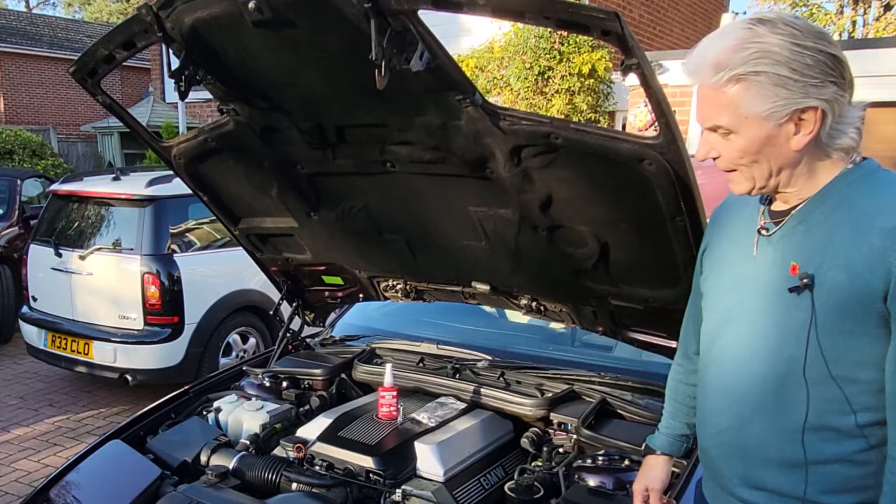I've had a valve cover oil leak. Yeah, it makes a bit of a mess. The oil drips out here, gets on the timing cover, and then gets all dirty and ends up looking black.

I noticed this when I was doing the last video about the camshaft sensor, so I thought I'd do something about it straight away. That was about 3 weeks ago, and the fix has worked really successfully, so I'm quite happy to show you it now.

Now, the problem with the valve covers is they have rubber buffers and a big gasket, and the usual fix is to pull the cover off, replace the gasket, replace the rubber buffers. Oh, and don't forget the RTV at the back on the half moon shape.

Did that on my M60. Yeah, it was all right, not too bad of a job, bit fiddly, but I thought I'd come up with a completely different plan that's going to take just a few minutes to fix rather than spending a few hours doing it.

Now, it's exactly the same fix as I did on the inlet manifold, which I did about 10 years ago, and that's proved 100% reliable, and it's helped a lot of people out as well. Very glad with that fix.

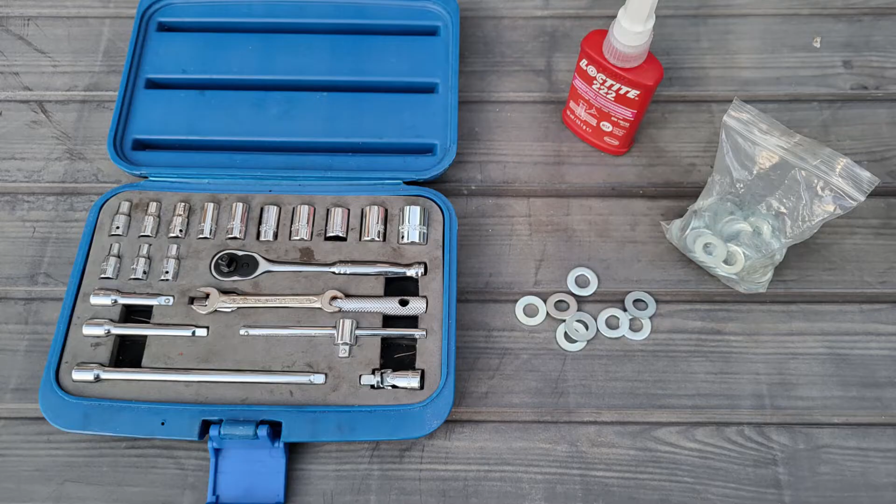So we're going to use a very similar routine, and all you need is a bag of washers, and I'll put up where you get them. Small socket set, and it's very important to use a small socket set. These fixings can be brittle, and you don't want to put too much pressure on them. Loctite 222, and that's all you need. Right, I'm going to bring you in, let's get on with it.

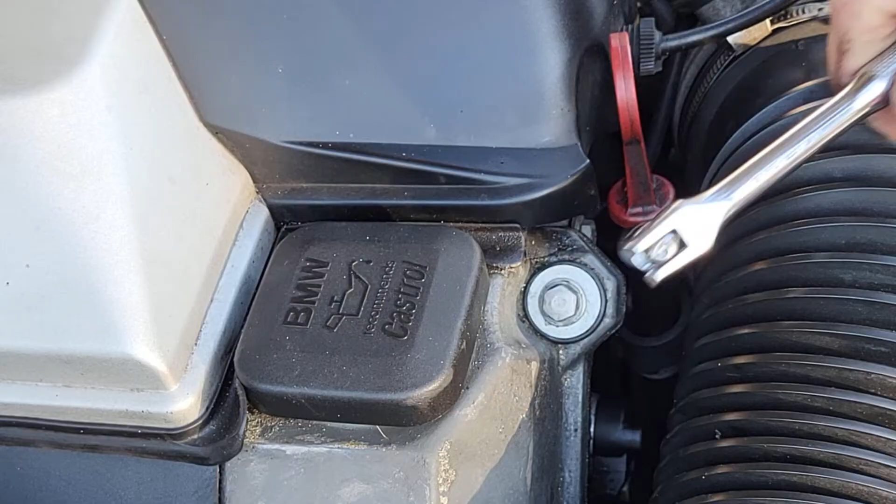Right, let's have a look where the problem is. Here's one of the fixings. That is a blind nut, not a bolt, and that confuses quite a few people. They're generally not tight, they come off with a bit of a ting. Right, let's get the blind nut out. There we go.

There you go, it's a blind nut. The thread doesn't go all the way through, it's got a hex top. Underneath that is a compression piece, which is a little rubbery gaskety thing. That's what one looks like. And there's the stud there. Now, the thing with these blind fixings is that they'll only tighten up a certain amount.

So if I plop that on there and tighten it up, there you go. So that is as far as it's going to go. Try and tighten that and you're just going to snap the stud off. That's how it works. The thread goes into the blind nut and arrests its movement.

Now, that was great when the engine was new and all these gaskets were lovely and rubbery, but after a few years this rubber gasket compresses, and so does the valve cover gasket itself. Now, we could just replace the rubbery bit, but unfortunately that still doesn't give enough compression, and I'll show you where the problem is.

So as we tighten back down the blind fixing, it'll reach this stud without actually compressing anything at all. So you've got no compression, absolutely nothing at all. The nut is still not compressing this rubber compression piece.

So the fix is absolutely simple, same as always. We fit a washer over that. We put some Loctite 222 in the thread because we want to make sure we get the right compression on that. They could use a thinner washer, but all these rubbery bits are slightly differently worn, so it's much better to use a bigger washer and just tighten it up until you get half a turn of compression. Okay, so we'll put that back on again. There we go.

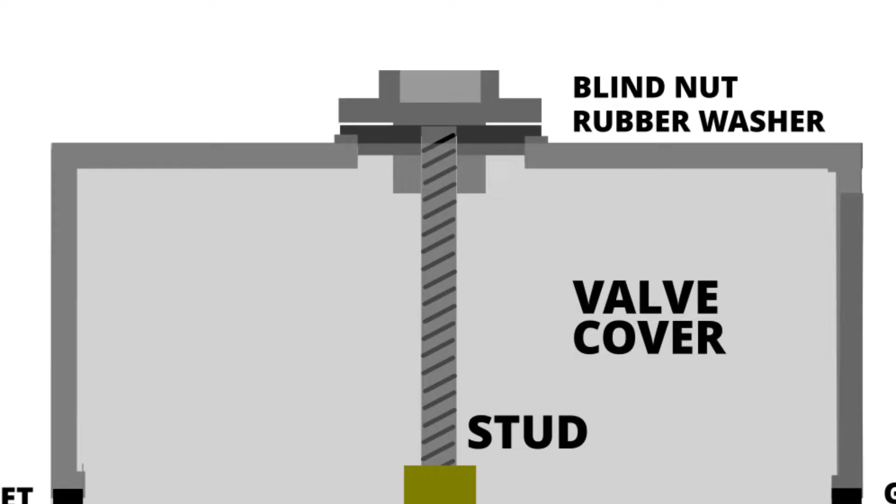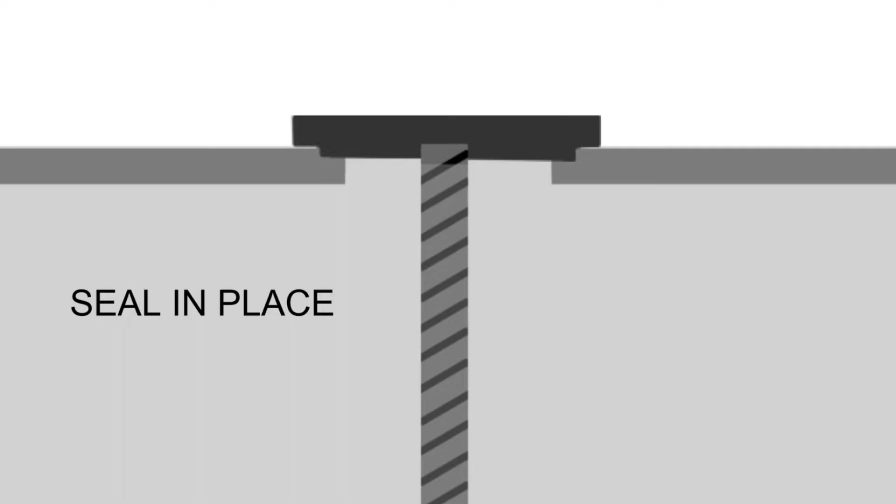It's a bit difficult to explain about blind nuts, studs, and rubber compression parts, so I've done a lovely animation. The bit at the bottom is the valve cover, the grey bit, then we've got a stud sticking out through the hole. Onto that goes a rubber compression piece, and then we screw the blind nut down onto it.

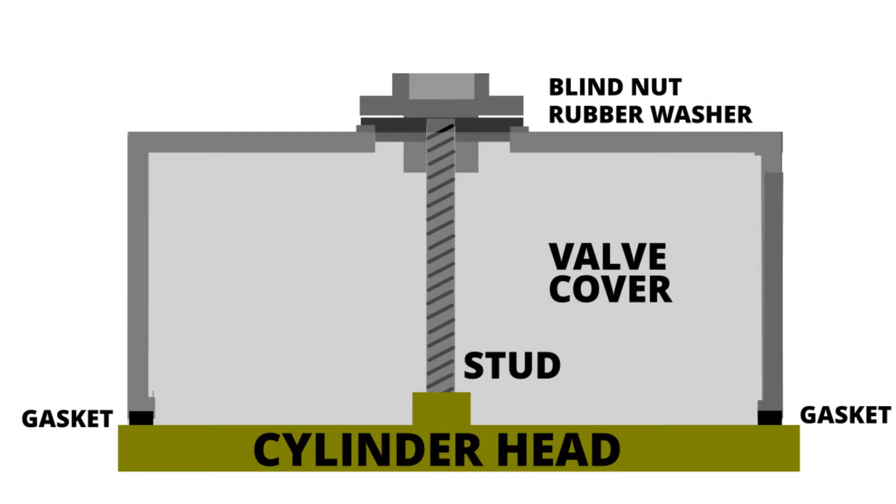As you can see in this example, it doesn't form any compression at all, because the rubber gasket and the rubber buffer have lost their elasticity. We could replace just the rubber buffer, but the problem is that the gasket is compressed as well, and replacing just the rubber compression piece will still not put enough compression on the gasket.

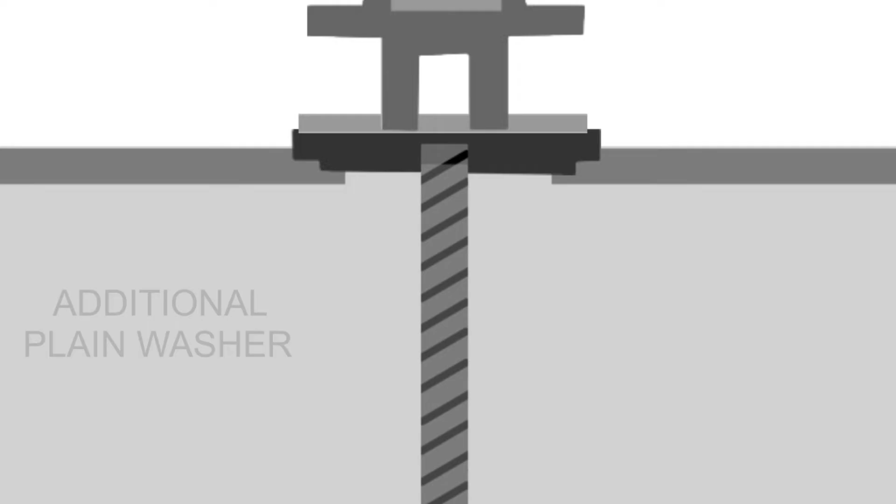So that's why we use a washer. We fit a washer under the blind nut, screw it up again, and then we tighten it until we've got half a turn of compression on the fixing. And that's why we use Loctite 222 to stop it coming off again.

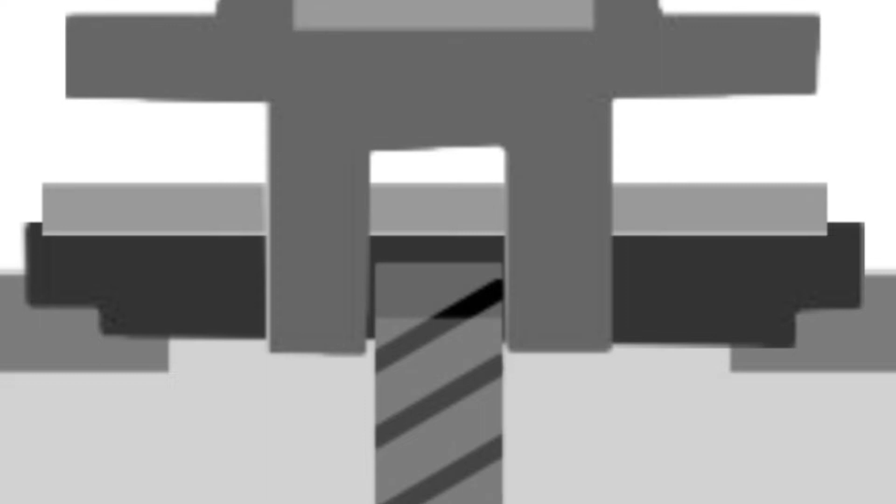Now, half a turn of compression is about right. You don't want to do any more than that, because then you'll distort this sort of rubbery bit. And when you've done quite a few of these fittings around here, that's quite enough pressure on the valve cover to allow the seal to work properly.

And the proof of the pudding's in the eating, of course, and that valve cover, done 3 or 4 weeks ago, not a drop of oil from it.

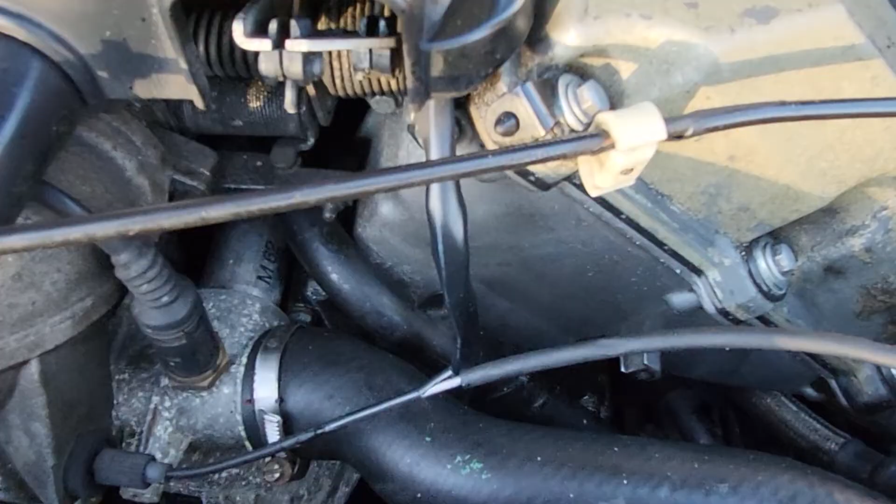So that's excellent. Let's have a quick look at that timing chain cover. Yeah, look at that, not a drop of oil on that at all. Yeah, that's worked really well, and that's been at least 3 weeks since I've done that.

So, yeah, really pleased, they've held on really well. Right, there we go then, all done. Quite a simple routine, isn't it? Something to do on a nice sunny day. Just take your time. But always important to remember, it's best not to do something and not break it than to do something and break it.

So that's the reason I've been using a tiny little socket set. You just can't get that much torque on these fixings to snap the studs. And that's the problem. If you try and tighten them up too much, you're going to snap a stud. Hence the Loctite 222. Remember, keep the compression on these fittings low.

There's loads of them, and combined pressure is going to stop any of the oil leaks. So don't go completely mad on it and try and tighten them up too much.

I mean, that was the problem with this system here. Because they were blind nuts, people would think, oh, it's leaking a bit, I'll go around and tighten them all up. But of course they don't tighten up, it's flat on the stud already, and all you do is snap off the stud.

And you see this so often. I've seen it on all the forums - I've replaced my valve cover, and unfortunately I've snapped a couple of studs. Yeah, goodness, a lot of trouble then. So just take it easy, and if it doesn't feel like it's going to come off, well, just leave it alone. Much better to leave it alone than break it.

So, nice lazy job for a Sunday, and it'll stop your oil leaks. But yeah, the easiest way to clean oil off of these sort of surfaces is to use fresh oil on a microfiber cloth, only for the engine of course. Yeah, it cleans up the muck really well, and also leaves a bit of lubrication on the aluminium, or probably magnesium alloy, that's used for these timing covers, and it stops them going all white and speckly.